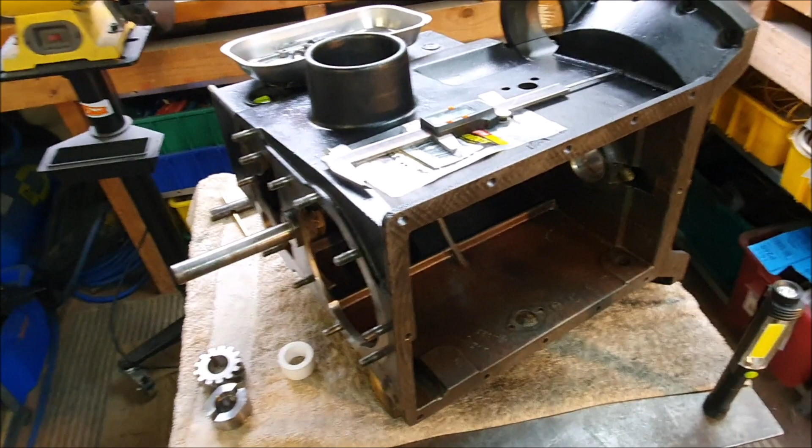I have the crankshaft out of the Riley engine again, and I think I've figured out what's going on now and what I'm supposed to do. I'm just still deciding the best way to do it.

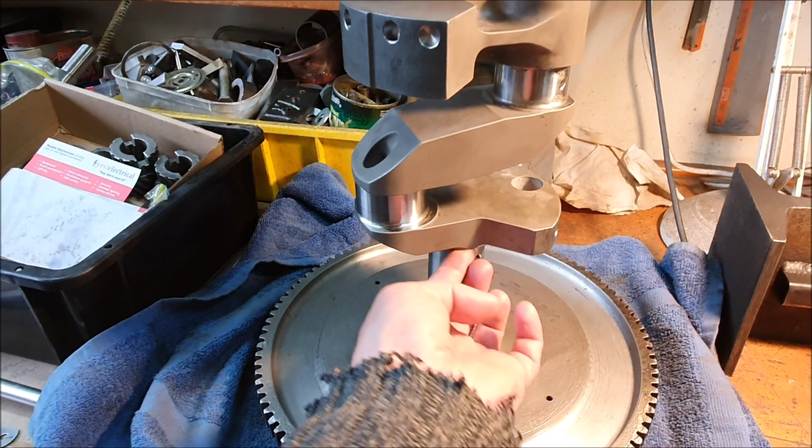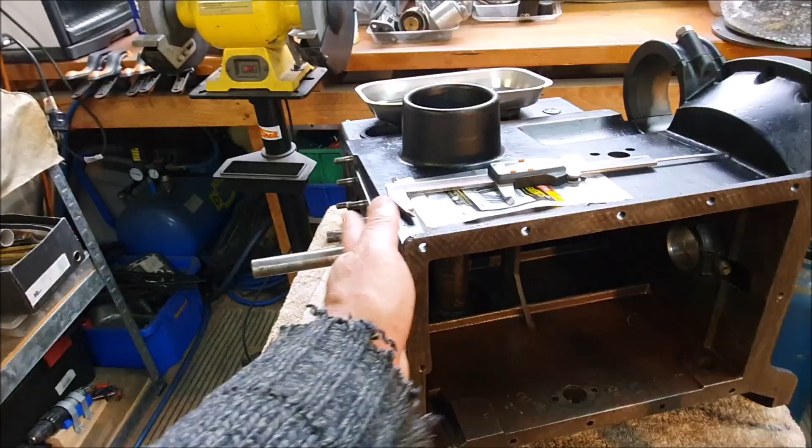You might remember from before that at the rear of the crankshaft here, inside here, there's quite a big radius on this modern crank. So I did have to relieve the bush there so that the crank would actually go far enough into the block so that the front cover would go on. I've done that. That all works now.

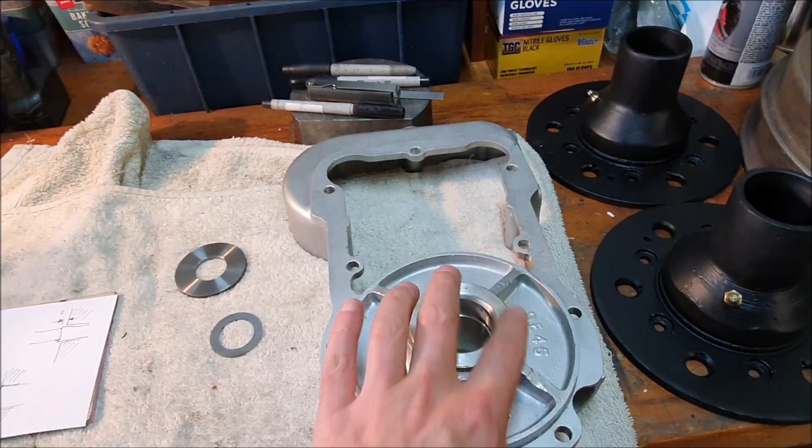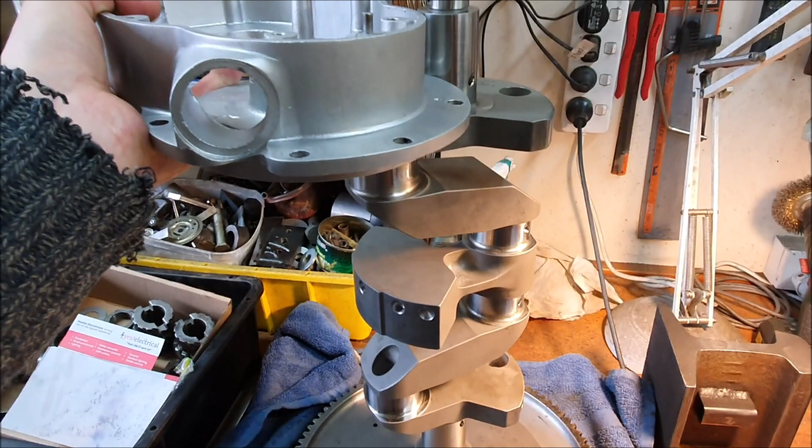The next problem was trying to figure out how you set up the end float, and that's all done on this front bush. So this is the cover that fits onto the front of the engine like that, and that's what sits down over the front of the crankshaft. So this face here pushes up against that bush.

It doesn't actually touch it. We'll get to that in a sec, but the end float is set, I believe, between this front face and this thrust washer. So this washer goes on there, and then when the gear is on there and the nut is on there, that pushes that thrust washer hard up against that shoulder.

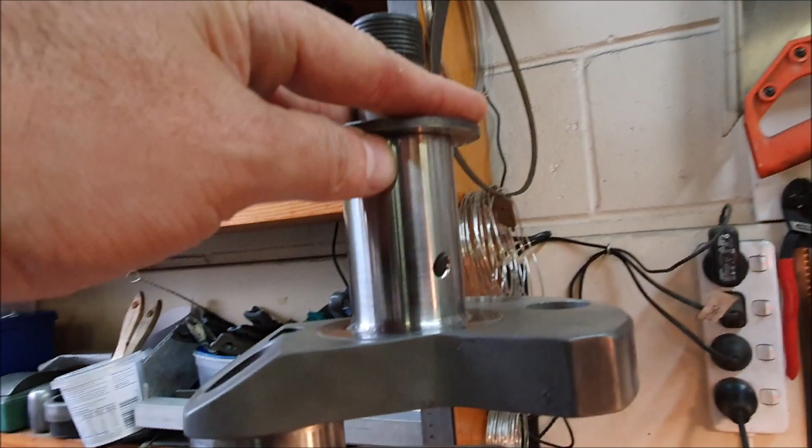And then it sits on there and it sort of rubs on that face there. What I was finding with mine is with the crankshaft in the block, I had about 10 thou movement forwards and backwards on the crankshaft.

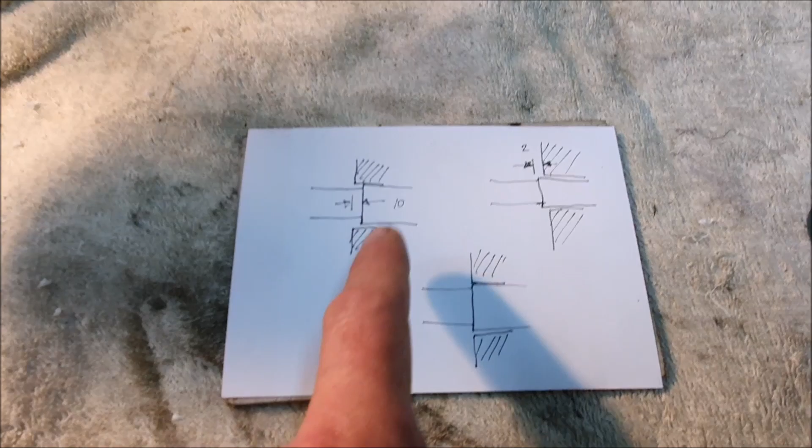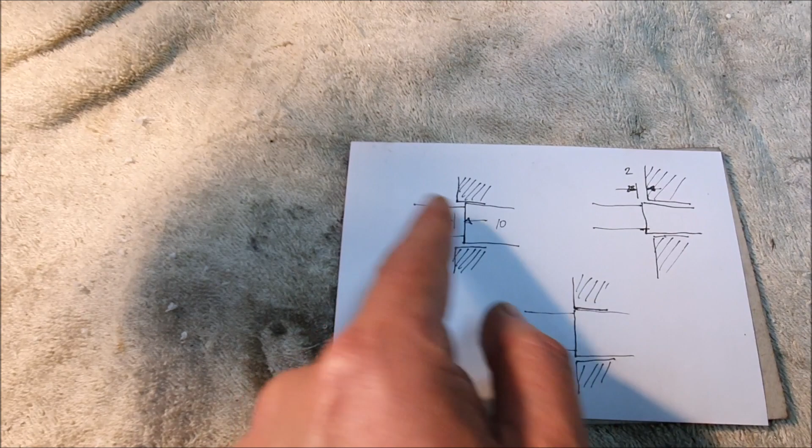And I had to draw this little diagram to figure it out for myself. So this hashed thing is this bush here, and the rest of it is the crankshaft. So with the crankshaft pushed all the way back, I had 10 thou movement, so I could move it forwards and backwards 10 thou.

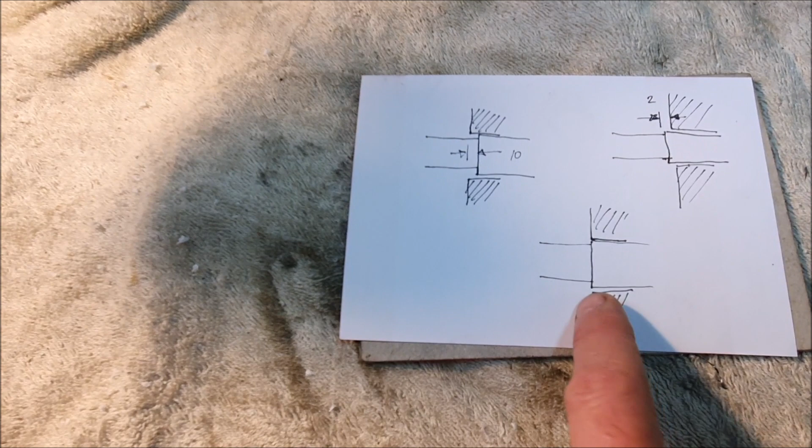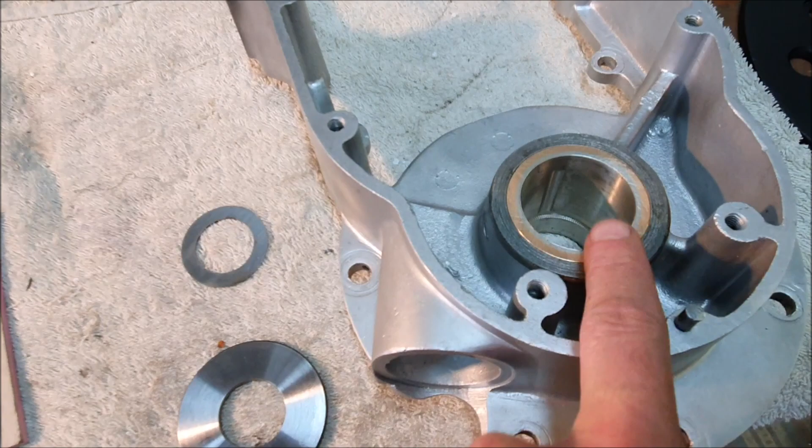When I pulled it all the way forwards, the crankshaft was more or less level with the front of the bush here. And it should be coming through, it should be protruding a bit, because otherwise what happens is you put the thrust washer on, and if there's no clearance there, that just locks everything solid, and that's what was happening. So with this in place and the gear, or rather my gear substitute, and the nut on the end, the crankshaft wouldn't turn, and it's because it was missing this clearance here.

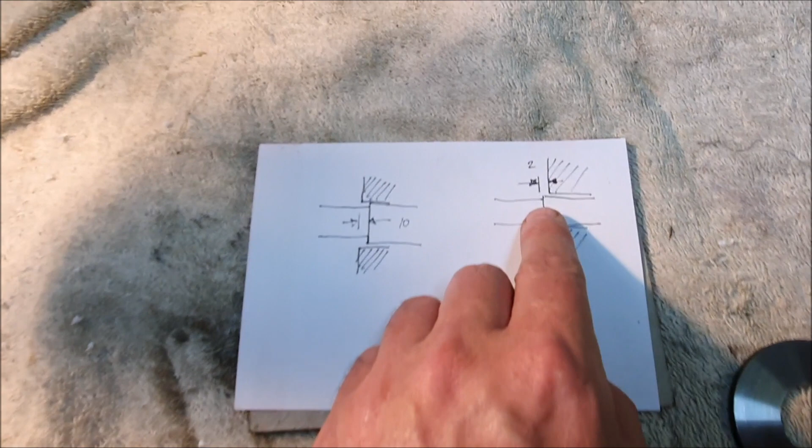What you're supposed to have, according to the manuals, is 2 thou of clearance, which would look like that. So that means this part of the crankshaft has to be 2 thou higher than the front of this bush, so that when the thrust washer goes on, you've got that 2 thou clearance. The crank can move backwards and forwards 2 thou. I already know it can go back 10 thou, so there's plenty of clearance in that direction.

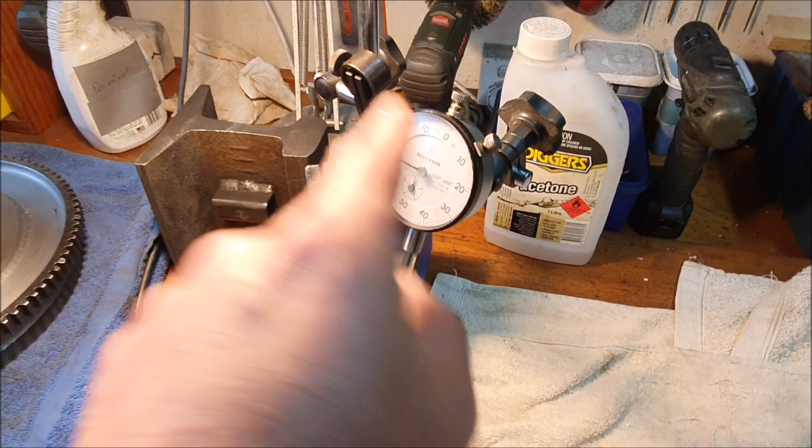To confirm all of this, I stopped messing around with rulers and feeler gauges, and actually got the indicator out. So I confirmed that 10 thou forwards and backwards, and I ordered some of these shims. So these are 6 thou shims, which are a perfect fit, luckily, for the front of the crankshaft.

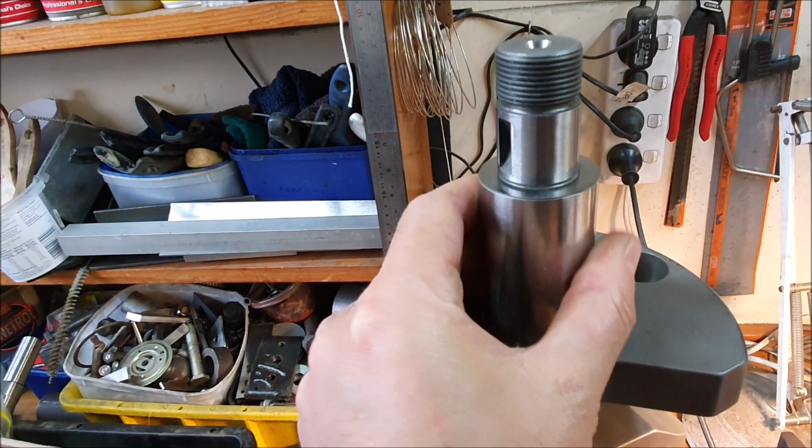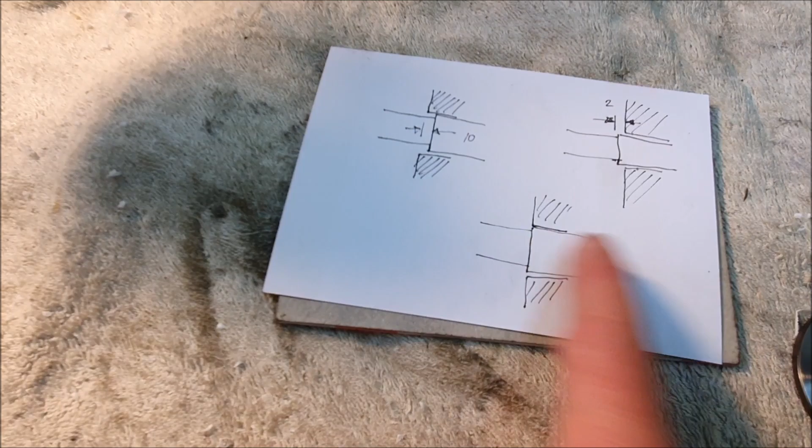So when I assembled the engine with the 6 thou shim there, and using the DTI on the end of the crank here, moved it backwards and forwards, I found I have 5.5 to 6 thou end float then, which is what you would expect if this was coming forward and being practically flush with the front of the bush.

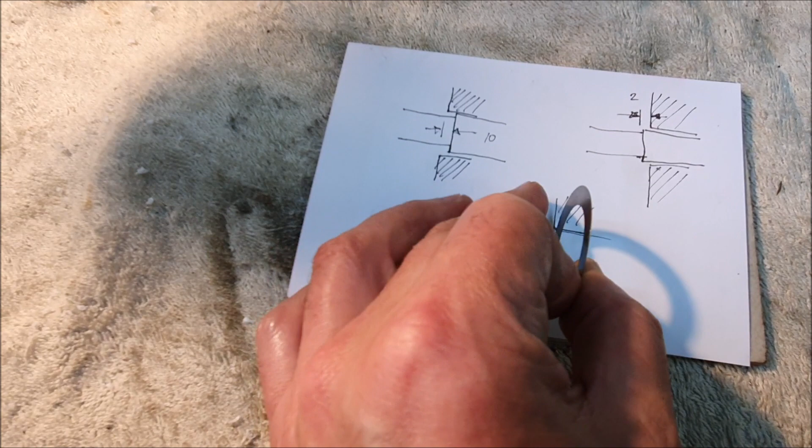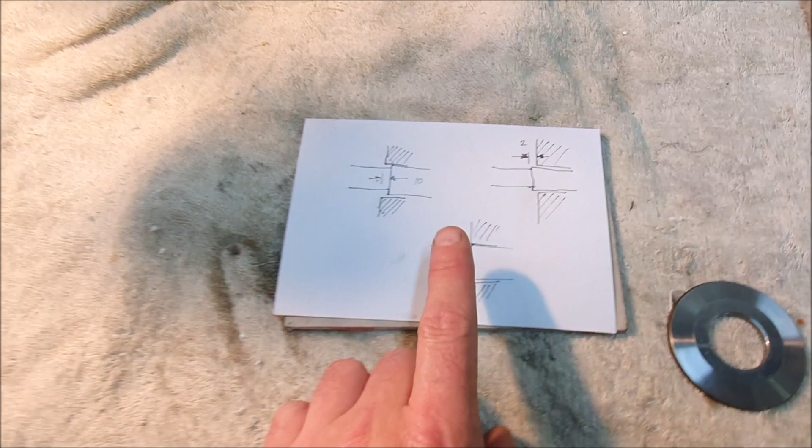So if you imagine with that shim in there, then when I measure the end float, because the thrust washer is now 6 thou out, it can move back that 6 thou, and that was giving me my 6 thou clearance. The manual states you should aim for 2 thou. Another figure I've been given is 3 to 5. 6 is probably okay as well. So I think that would actually be a solution I could run with.

But the proper way would be to take some off here, but there's no way I can machine this in my vise. It just won't, in my lathe sorry, it just won't fit. It's too big. And I wouldn't trust myself trying to cut that on the mill. I'm not that good a machinist. But what I was wondering is, could you take 2 thou off the white metal here, which will allow the crank to go forwards further?

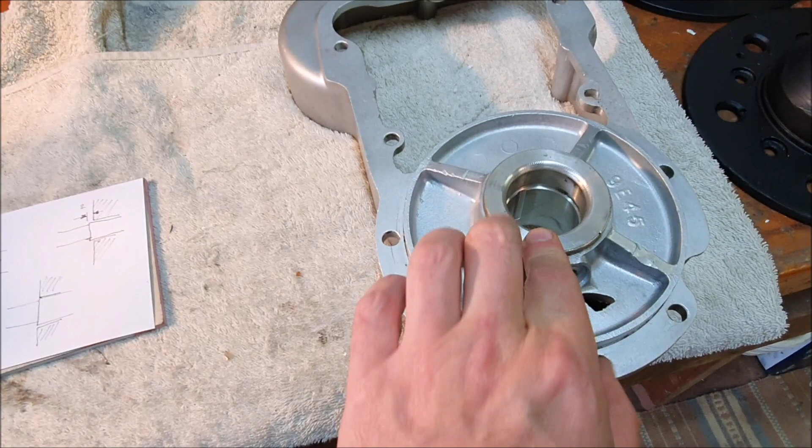Now, the Riley engine's a bit weird. My understanding is when the engine's running, there isn't any appreciable forwards and backwards thrust on either this face or the other face of the bearing. The thrust all usually comes on when you engage the clutch.

In a normal car, like the MG say, when you push on the clutch, you're pushing forwards on it. It's a bit hard to explain, but the force as you're pushing down on the clutch pushes the crankshaft forwards, which if that was the case for this engine, it would mean this face would be rubbing on here when you put your foot on the clutch. But because this is an original Riley clutch, it's a little bit different.

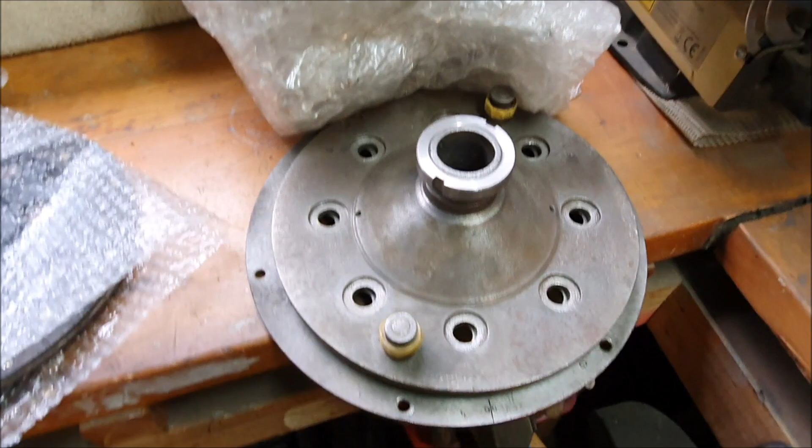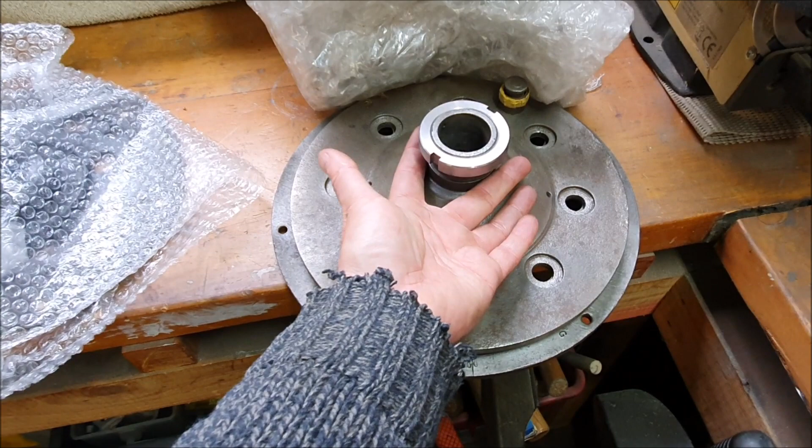This goes on the back of the flywheel. There's usually springs in there, which is what keeps this all separated. And there's a bearing that goes on here and a metal cup that fits on here. When you engage the clutch on this one, you're actually pulling this back.

My understanding is that this is actually upside down. You have to imagine this is on the inside. This is the cover that goes over the flywheel. The springs are usually flattening all this down, so it's compressing the friction plate.

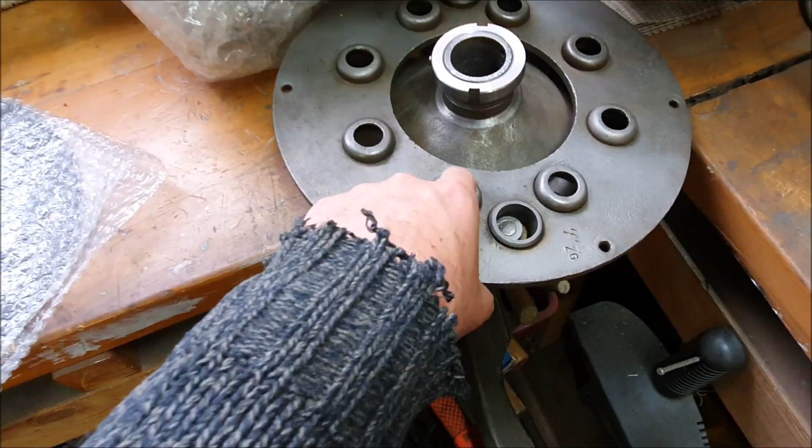Normally when you engage the clutch on the Riley, this pulls backwards. So that's going to pull against those springs, normally inside there, which is going to pull the flywheel the opposite way, I think. Which means there shouldn't ever be much thrust on this. It's all taken up on the front one, which is this.

So if that's the case, can I not just take 2 thou carefully off the back of this to give me the clearance I need and give me the end float? There is at least 13 thou thickness of white metal there.

Like I say, I'm not that good a machinist to be able to do that, but I think I could probably carefully flatten that down with a piece of fine wet and dry on a piece of glass. It may take a little while, but probably not, because this white metal is really soft. I think that might actually do the trick.

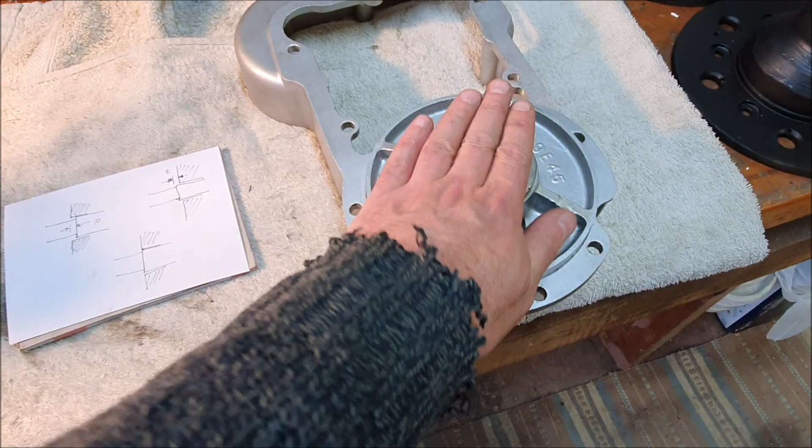I need to think about that a bit and see if that is actually a solution, but I think that would work. The reason I can get away with doing that is because that isn't ever really used as a thrust face. So even if I don't get it perfectly flat, I don't think it's going to matter.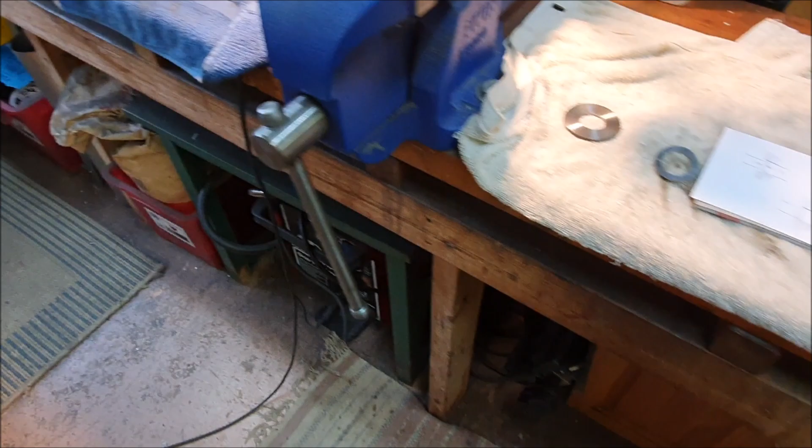So the other thing I've been looking at is how far down the flywheel is fitting on the taper. It didn't seem like it was going down quite far enough. Someone in the comments really helpfully left me a number, which was about 72 millimeters between here and here, I think, if I'm understanding the comment correctly.

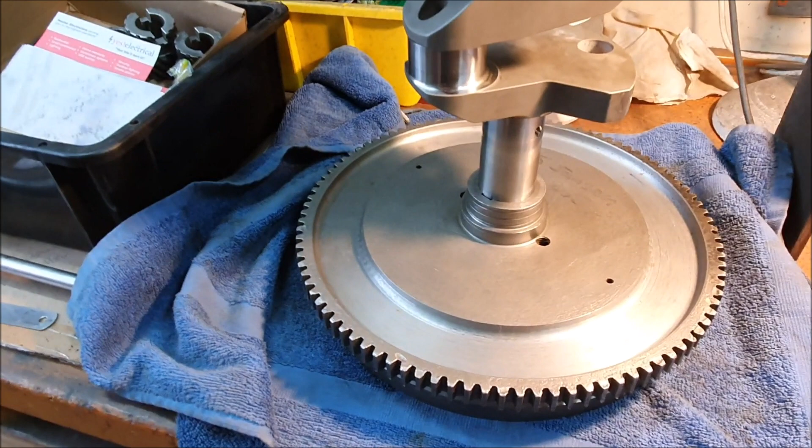When I measure mine, it's about 73.8. It's a bit hard to measure it exactly. 73.8, so about 2 millimeters difference. I'm not sure if that's enough to make a difference to it all.

I don't think I can do it with one hand. I'll just pause this for a sec. Right, it's quite heavy. With the nut done up, you can see the nut isn't going flush.

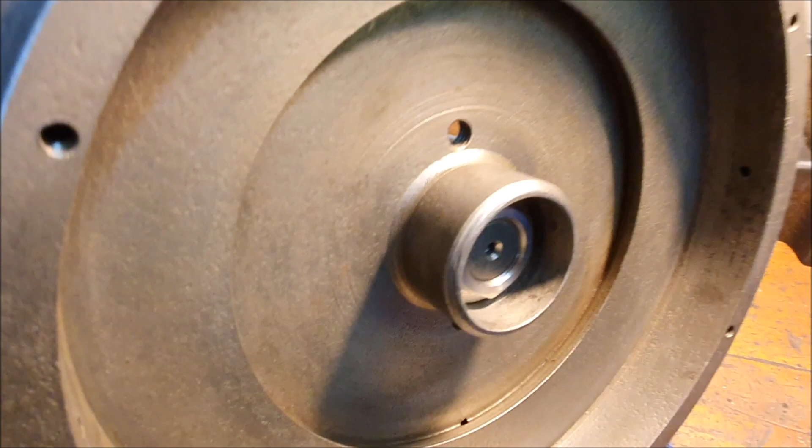But there's also a bearing that fits in there, which is over here. This is the little bearing that the input shaft of the gearbox fits into. There's definitely plenty of room for that in there. Oh, I don't want to push it all the way in because it'll probably get stuck.

I don't know if that's enough of a difference to matter. I think the thing is, I'm not going to be able to tell until I do a test assembly of it all and try and bolt the gearbox and the clutch on and see if they will still actually work the way they're supposed to. Otherwise, what I'm going to need to do is have the flywheel taper remachined so that this will go the extra 2 millimeters down.

Is 2 millimeters enough to really make a difference there? Very hard to know. So the other thing I've been looking at is I've cleaned up the cam gears.

I think I'm going to need to get new bearings. These seem a little bit pitted. It's always hard to tell if I can reuse things or not. But on this one, I have a little bit of a problem, which is that clearance in there. I'm not sure the best way to fix that.

When this is all together and it's running, I don't know how much thrust there is on either of these. Can I just get away with a washer inside there? Yeah, just another strange thing to look at.

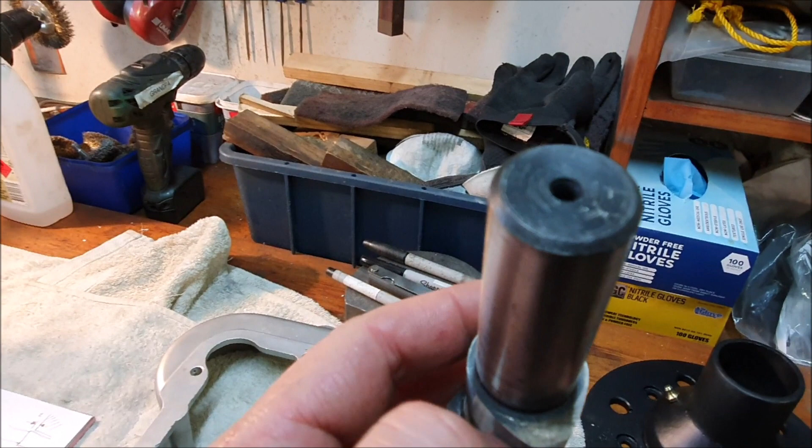The other thing I'm not sure about is, normally, supposedly, Riley cams, the real ones, the exhaust cam is supposed to have little marks. I believe on here, the fourth lobe, there's meant to be a little dot or a cross or something, but I haven't seen that on these. So I'm not sure what these camshafts are or what the grind on them is. So that's something else I have to figure out.

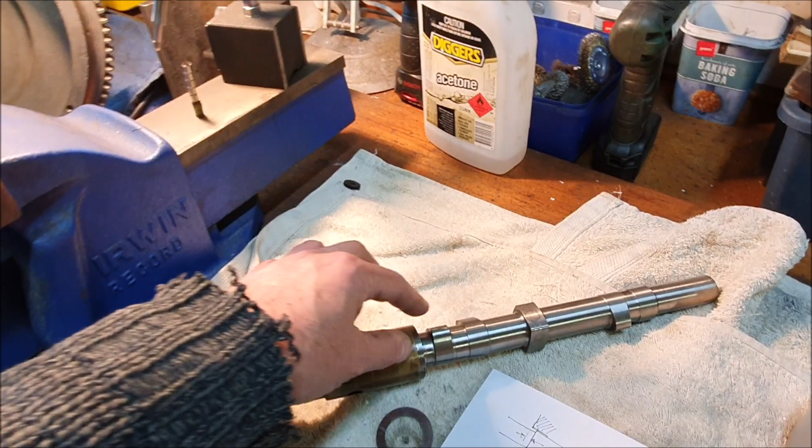I may actually set this up in the lathe just so I can hold it between centers and make up a degree wheel on it, and I want to check and see what the cam timing is on this, just because these look like they've been reground and I'm not sure what they've been set to.

So because there's two camshafts, there's only 4 lobes on each one.

But the other interesting thing about the Riley 9 engine is you've got this special cam in the middle, which you can see has 4 lobes. And inside the head, there's what's called lag tappets, which is just a kind of dummy tappet that sits on there, and there's a spring behind it. So when the head goes on, it's pressing on this continually.

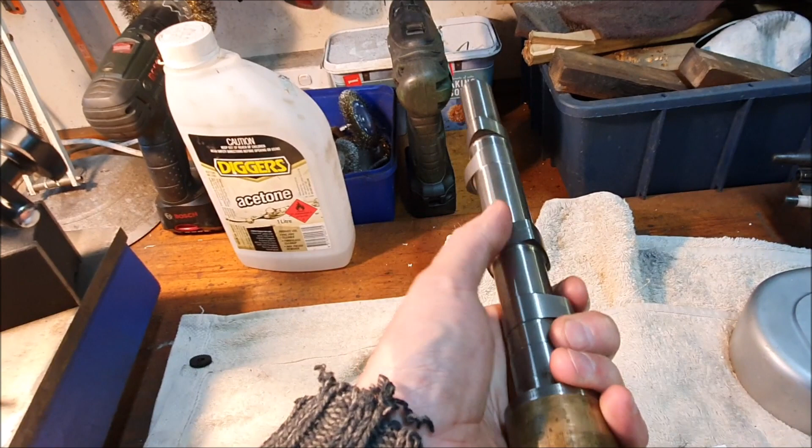And apparently the idea behind that is because you've only got 4 lobes on this cam, it's quite lumpy as the camshaft turns and it's pushing the valves up and down. And this extra lag tappet in the middle sort of helps to even out some of that unevenness on the forces on the camshaft, apparently.

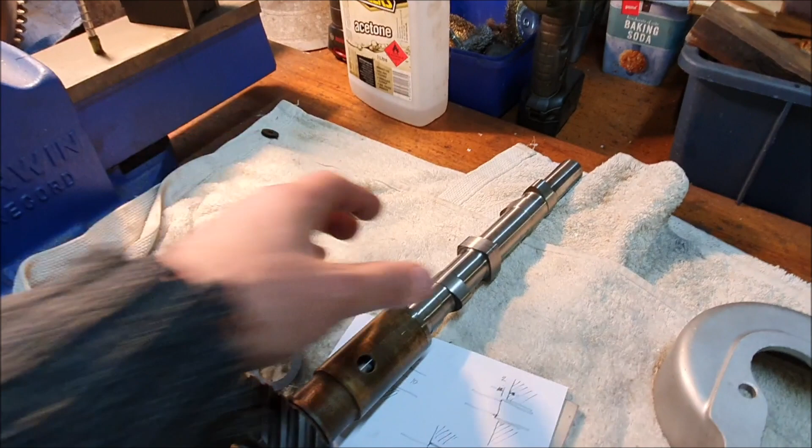I think some people say they leave them out, other people say you have to put them in. I've got them, so I'll probably just put them in. But yeah, it's one of those interesting little things about these vintage engines.

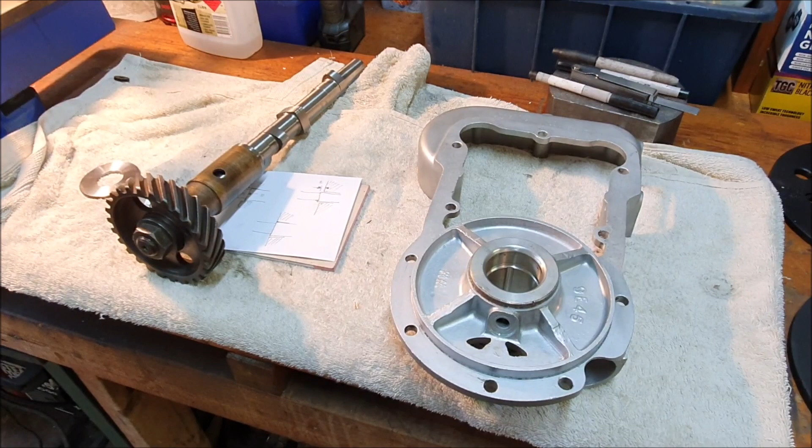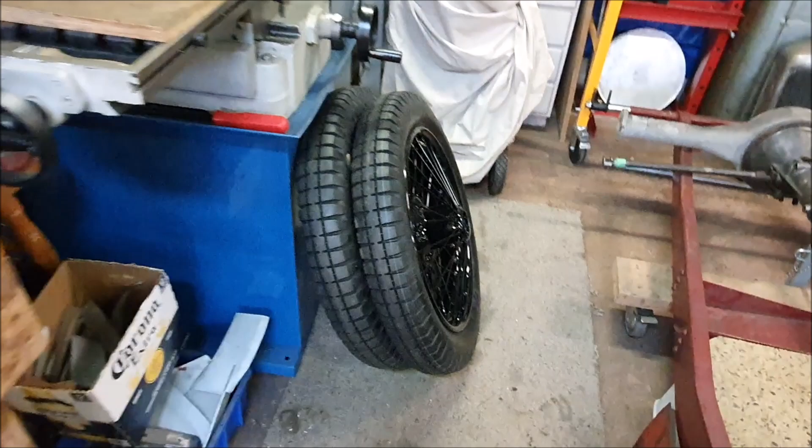So I'm not going to do anything tonight. I'm going to think about it a bit more. I can't remember, but I painted up the hubs, and I may look at fixing - I've got the paint now just to touch up the wheels where the paint was damaged.

And tomorrow I will look at Loctiting and tapping with a hammer these rear shackles home, and then figure out how I'm going to cross drill and rivet those in place.

I think that's it. Also, I did remember that I've got an engine crane or an engine stand, so at some point I should put that on there, but I haven't so far because, of course, when you've got the block on the engine stand, you can't get the flywheel on and off, which I need to do at the moment.

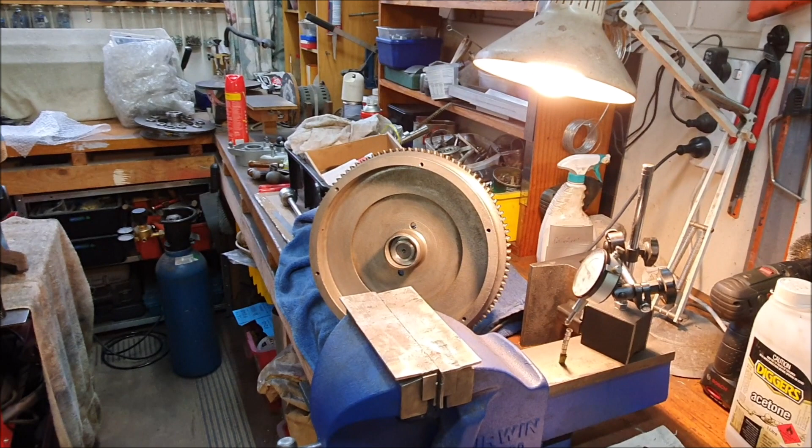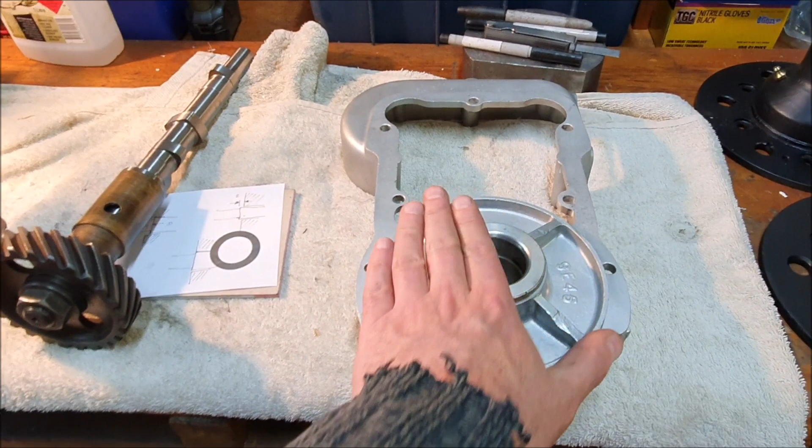I think the next thing to do will be figure out what I'm going to do with the end float, which is either use the shim and end up with 6 thou end float, which may be too much, or carefully flatten this down 2 thou, which will give me the 4 thou end float, which is as per the book. I don't believe it's going to make any difference to where the rods sit.

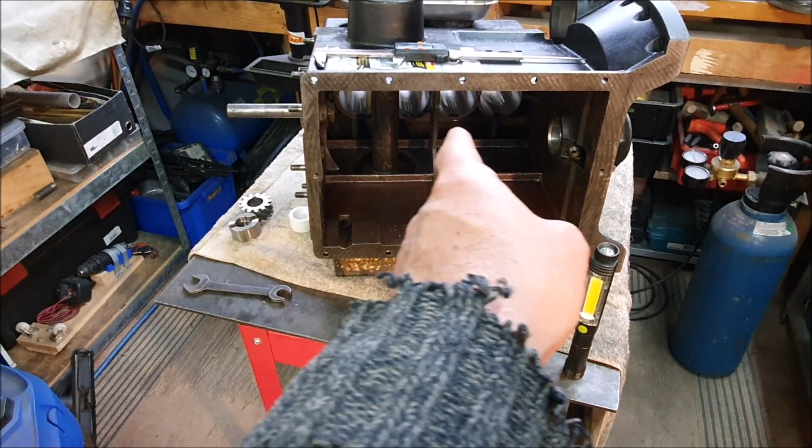We're talking fractions of an inch, and they're floating at the top end anyway. So if they're slightly off center, I don't think it matters. I'm not really sure.

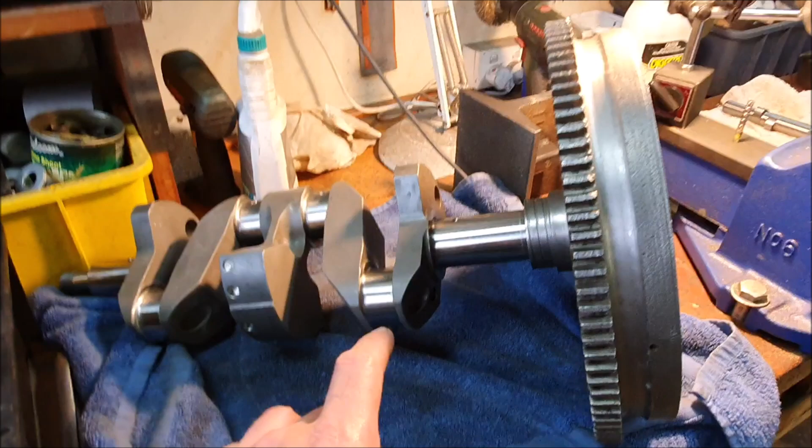Yeah, this is the tricky one. If this taper needs to be opened up a bit, I have to go back to an engineer to do that. There's no way I can do that myself. So more things to think about.